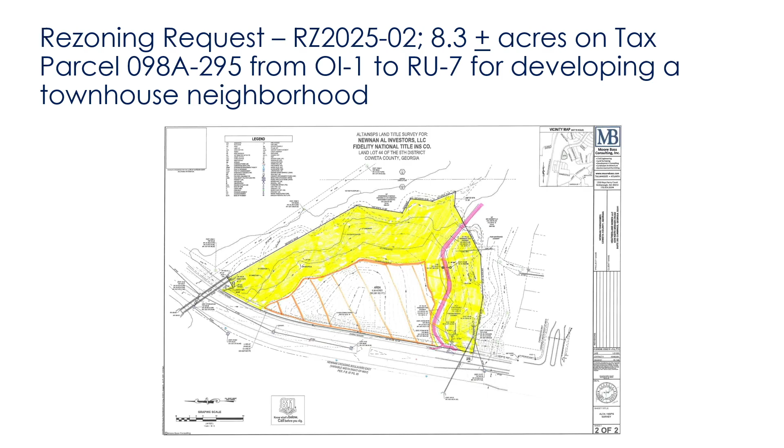This slide gives you an illustration of the 8.3 acres. The area in yellow shows you the wetlands and stream buffers that are the unbuildable, undevelopable area of the site. The area in the orange stripe shows you the net area that can be developed upon.

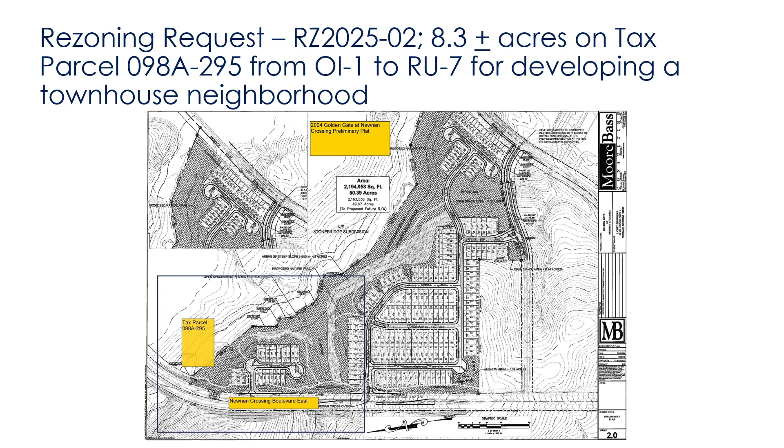Back in 2004, this piece of land was part of a larger townhome development known as Golden Gate that came through and was approved. The portion we're talking about was originally intended for the RU2 zoning district at that time. In 2008, the piece was then rezoned from RU2 to OI1, as the developer was interested in putting in some office and medical buildings.

Flash forward to 2025, the site has remained undeveloped, it's wooded. You have this request before you this evening from GHV Newnan LLC, with Mr. Jones representing them. This is originally, like I said, 33 units.

The site will be sold at market rate conditions. The anticipated market price of units would be anywhere from the high 400s to the low 500s, depending on the market at the end of completion. The site plan before you has gone through a couple of different staff reviews; we've massaged this a little bit with suggestions from engineering, landscaping, and the utility company.

What you see here is the existing link on the south side of the project. The entrance will be here. This will be a one-way street, so traffic will come in, residents will go to their homes, and they will exit out on the north side and go right out. There'll be no full left turns coming out of this, so impact to traffic will be mitigated in that fashion. That was one of the design considerations.

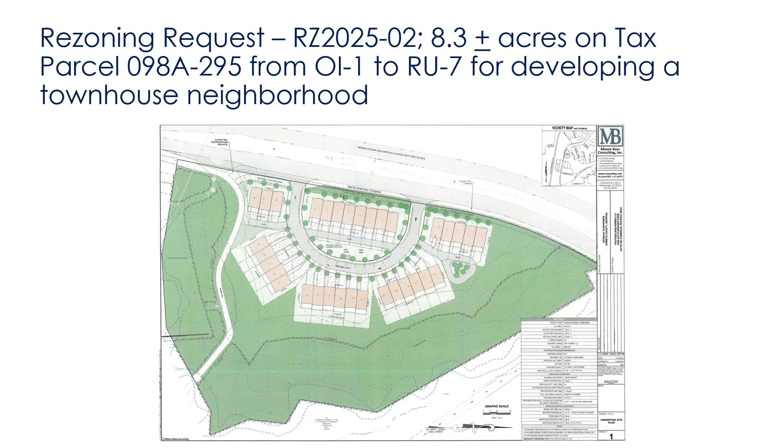Also, engineering has agreed to allow this development to proceed with rollback curbs for the purpose of townhome developments, which will improve and enhance the development. This gives you some examples of the proposed types of townhomes they hope to build.

Okay, so that's the streetscape. Yes, want to make sure we're looking at those that face the bypass or front doors. I believe this would be the look here, if I'm not mistaken—this would be the kind of look they try to emulate all along Newnan Crossing Boulevard East. There are some proposals on this back corner piece as you're coming into it—see some of the streetscape features, the fences, the stonework, the ornamental aluminum fencing, along with the shrubs and trees that landscaping will also provide.

In addition, the applicant has agreed to expand and improve the link pedestrian path along the front of the property and the development. They're also agreeing to work in tandem with the developers across the road, looking at some sort of pedestrian access across Newnan Crossing Boulevard East. There was a conversation about a bridge, and a conversation about a tunnel, but they're willing to work with those developers on a project that's in the loop right now for a future road connection from the link across to that future development.

This just shows you an example of some of the backs of them, with the decks and garages underneath the back decks. It's more of the rear-loaded look.

You'll see on the screen, zoomed in on the concept plan, we have on-street parking for overflow, but additionally each townhome has a two-car garage, Mayor, to your question earlier, and each driveway has sufficient depth to accommodate two cars as well. So you've got 4 parking spaces for each unit, plus overflow along the curvature right next to the centralized mailbox unit.

In terms of trash, we also discussed flow for not only trash trucks but more importantly emergency service vehicles with staff when we met on multiple occasions to refine this plan. I don't recall how many versions, but I think this is, Steve, 4 or 5. We've been through quite a number of iterations to accommodate engineering's concerns, zoning staff's concerns, and a lot of other concerns we heard. To the internal flow, that's also one of the reasons for the rollback curbing.

Any other questions? I have a question. So this is going to be governed by like a central homeowners association or covenant of some nature? Yes, Councilman.

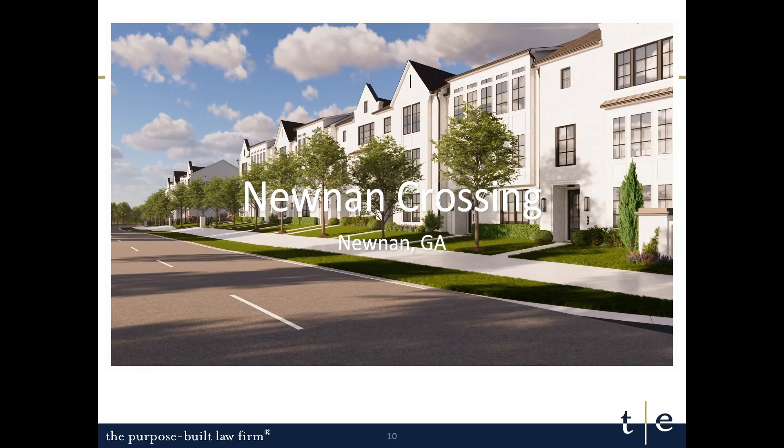This video gives a better overview of that separation and the elevations. I know there was a question about which elevations face where. So this is coming down the bypass, as you'll see those rear-loaded townhomes, and then again that landscaping strip separates Newnan Crossing bypass from the easement for the relocation of the link.

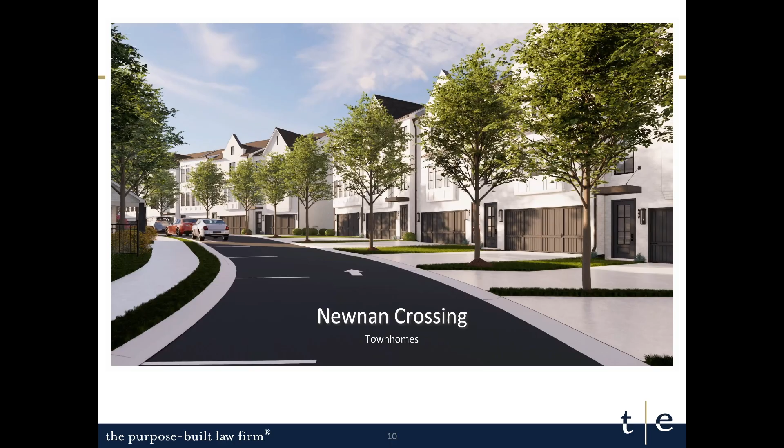To the landscaping question, you'll see that Mr. Moore did a great job providing that landscaping strip for street trees between the units. You'll see the auxiliary parking on the left, but also note each townhome has 2 driveway parking spots and 2 garage parking spots, so there's tremendous parking for residents and guests.

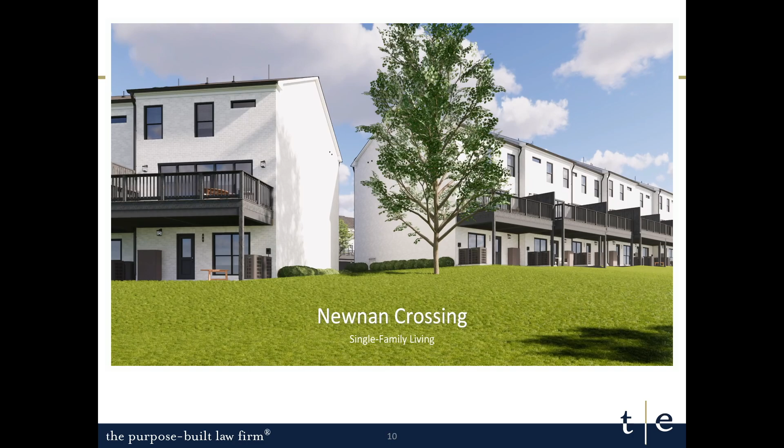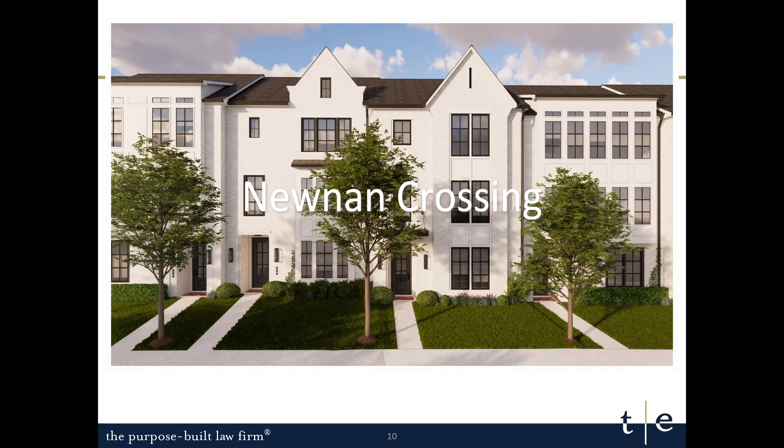This is the rear of those front-loaded townhomes, interior to the site. And then again, coming back to the rear-loaded townhomes, these are the ones facing Newnan Crossing bypass. I do want to point out internal to the site there's also a green space area that exists in the same spot where the centralized mailbox unit will be located.

It's very attractive, I always like it. When somebody designs a link piece section, my default is I go back to a mother with little kids learning how to ride a bike, and where do they feel comfortable? Study after study shows the most at ease they feel is when it runs off into the woods and there's no cars.

But when your project is really pretty, by the way, I like it, but that's what's called a shared use - it's not a dedicated link, it's a shared use with the sidewalk. When you come out of these woods and you've got 2 kids on bikes going everywhere, all of a sudden the mom or dad has to grab these kids and say wait a minute, because if they make one wrong turn and go into that traffic, and this isn't a 25-mile-an-hour section, so the panic goes up.

So really the link's most successful pieces are something like you've got available, when all of a sudden we can give them that comfort back there, and your residents will appreciate it as well. So I'd like you to consider working with staff on that, and let's understand what opportunities we have while we have a chance to look at them. I think it would be beneficial to your site as well as Newnan. I would appreciate you being willing to do that. Certainly, Mr. Moore and I will look at that. He's the engineer, I'll keep following up with him.